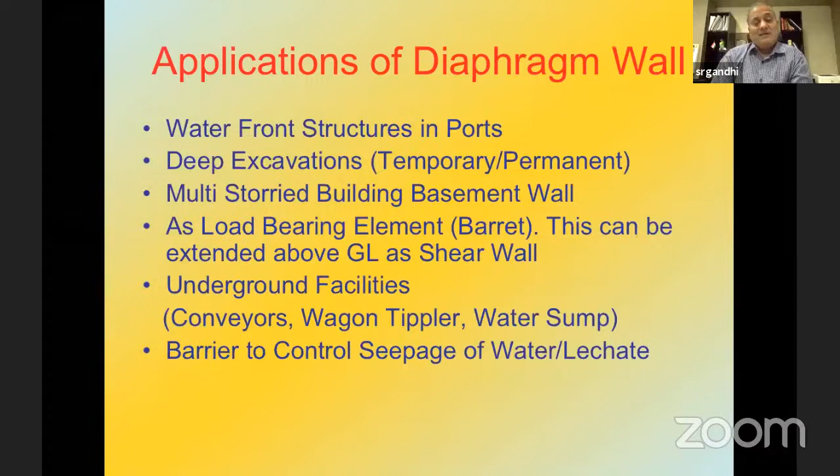It's also used for underground facilities like belt conveyor, wagon tippler, water sump, and also as a barrier for control of seepage of water or leachate in a municipality solid waste dump or other harmful waste dump.

The common shapes of the diaphragm wall section: the most popular is rectangular because the construction is simpler here. The length of a panel varies anywhere from 2.5 to 4 meters, sometimes even wider if the equipment for handling larger size reinforcement cage is available. But normally it is 2.5 to 4 meters.

Width is typically minimum 0.6 meter to up to 1.2 meters. And depth up to 25 meters have been executed without much difficulty. And in some cutoff walls, it has gone to deeper levels also.

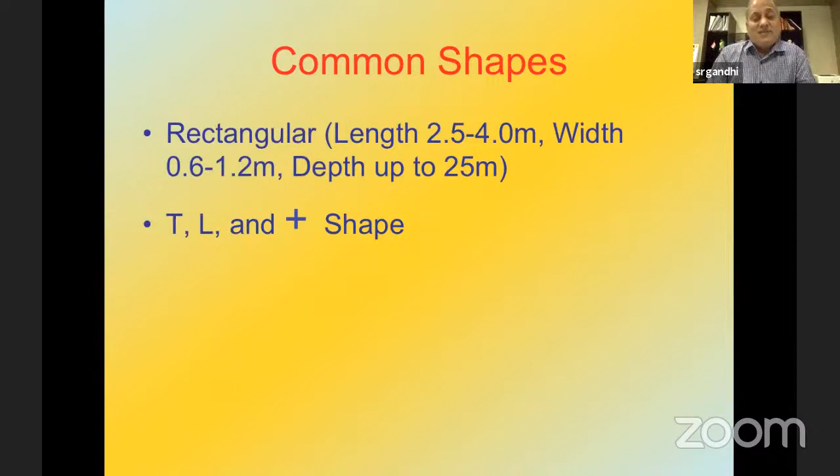Apart from rectangular section, the T section is also very commonly used where you have larger depth of excavation and you want to avoid struts or anchors because it has higher moment of resistance. So you have a T section. L section is used more for the corners of a berthing structure in a port, and the plus section is used as a barrette for a load-bearing element, as I mentioned earlier.

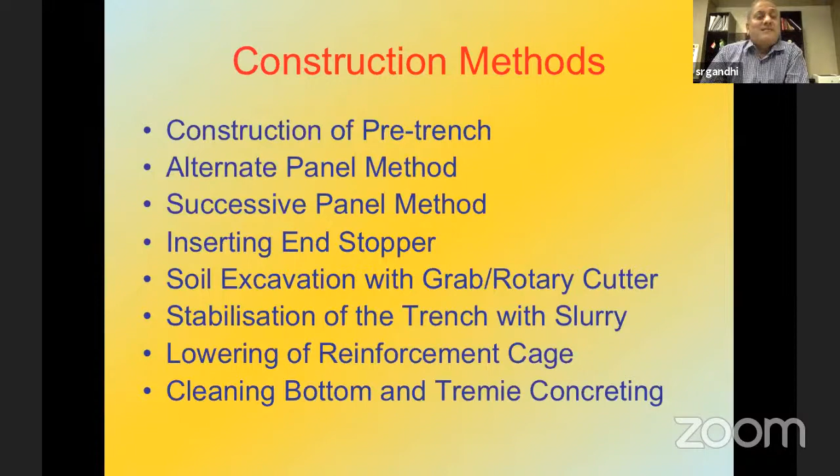The construction of a diaphragm wall panel is more or less similar to what we have for bored cast-in-situ pile. You have the same temporary support at the ground, then excavation or grabbing from this temporary support, and then you have bentonite slurry stabilization and lowering of reinforcement cage, cleaning the bottom, and tremie concreting, as in case of a bored cast-in-situ pile. We will see with the pictures some of these operations.

I already discussed the stability of trench wall is very important in diaphragm wall construction. Other important thing is water tightness of the joint between the two panels of diaphragm wall. So if this is not there, you will have a lot of groundwater seepage into the basement or underground railway station and all, which needs to be tackled.

You need to embed the diaphragm wall in rock sometimes, so you need special tools for cutting the trench in rock. And in many places you prefer a strut-free excavation.

So up to certain depth, it is possible using the T-shaped panel. And there are various claims for extra consumption of concrete if the soil investigation is not right, and if there are collapses observed which are not foreseen based on the soil data.

So when it is used as a basement wall for an underground metro station or a basement of a building, it's also important to have a monolithic joint with the foundation floor. So this is one of the points in diaphragm wall construction.

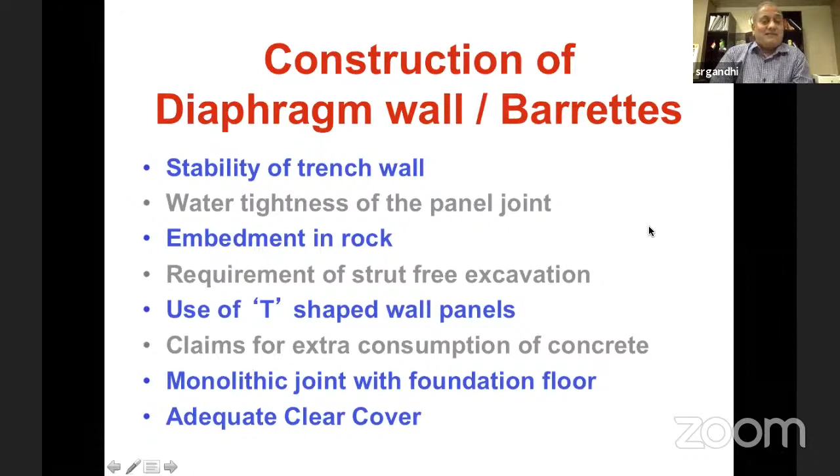So the first step is to construct a small trench, prepare this concrete pre-trench, and then the tool can operate between the pre-trench, between the two L-shaped sections, to cut the soil between the two sections.

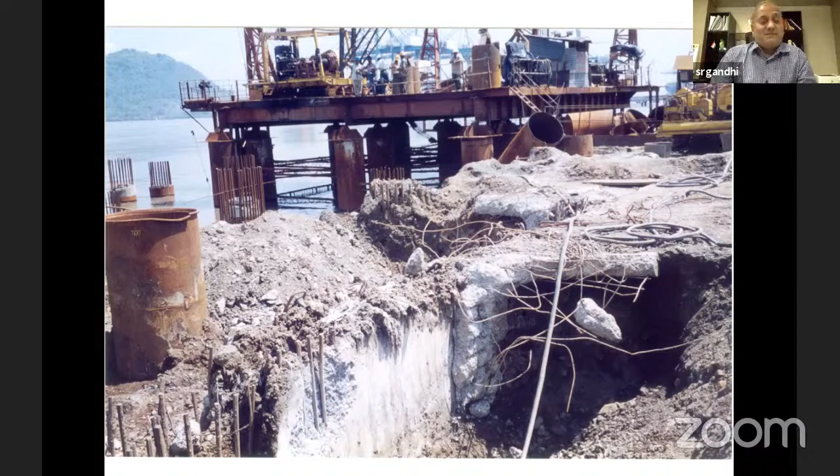So here you see a typical view of a hydraulic grab, which is used to cut the diaphragm wall panel. There are two pre-trenches here between which the soil is grabbed and removed. And there are different types of equipment available for cutting the trench.

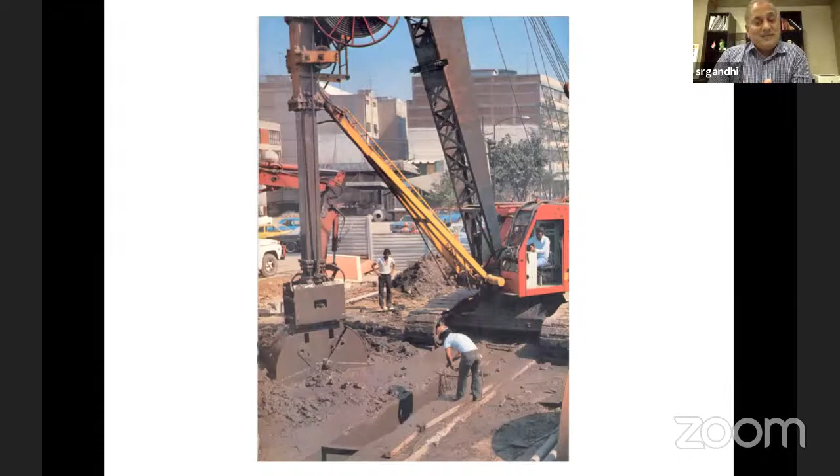The trench, as you cut, it has to be stabilized with bentonite slurry. So you always find the diaphragm wall site muddy or messy like this, with all excavated soil and slurry spilled around. There's another type of...

Normally 500 to 600 mm thick. So that's why you need minimum thickness of 600 mm for operating this tool in the pre-trench.

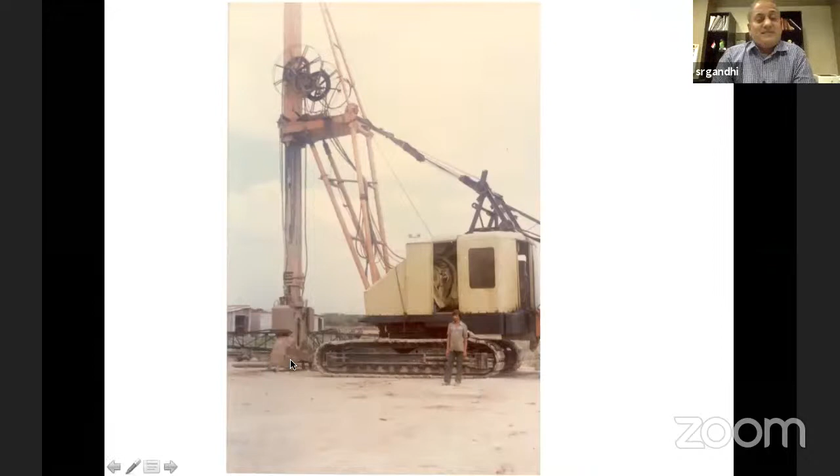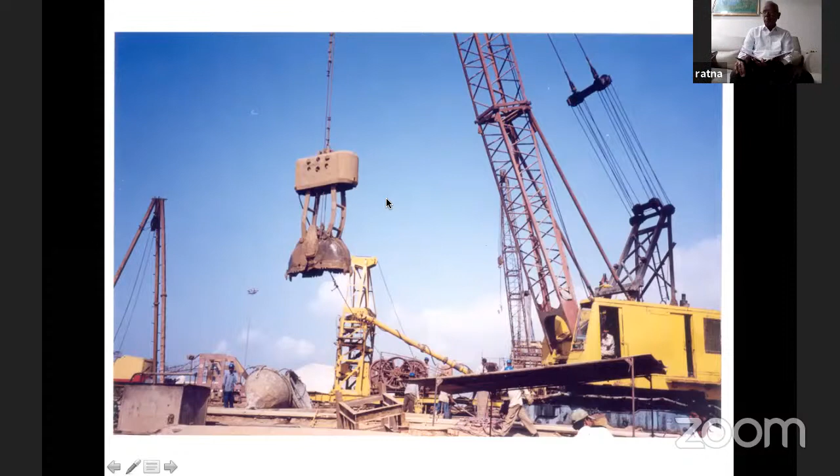Now this is an old system where you can have the grab operated through a wire line. It's not so much desirable because you have less control on the orientation of it. And there are chances that as you go deeper, it may not maintain the orientation in line of the diaphragm wall. It's very rarely used now.

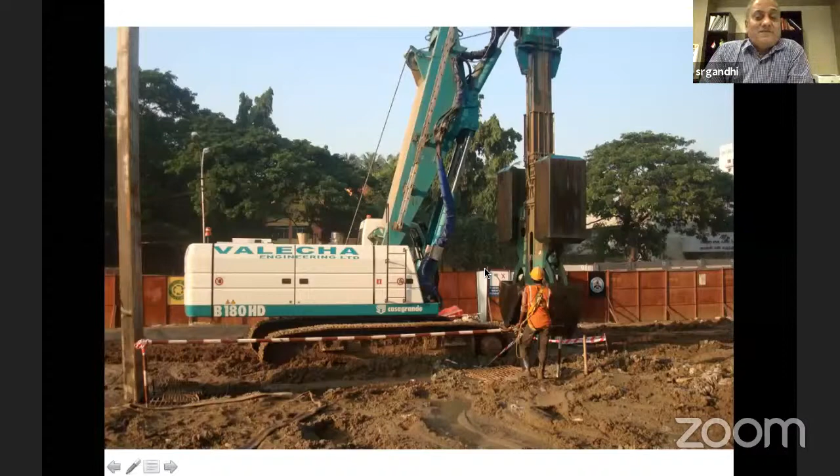So these are the powerful diaphragm walling tools which have a width of 1 meter and can penetrate 15-20 meters deep below the ground. What you see, the attachment here, is having a telescopic section like the aerial in your TV, and as it penetrates in the ground, a smaller section emerges out.

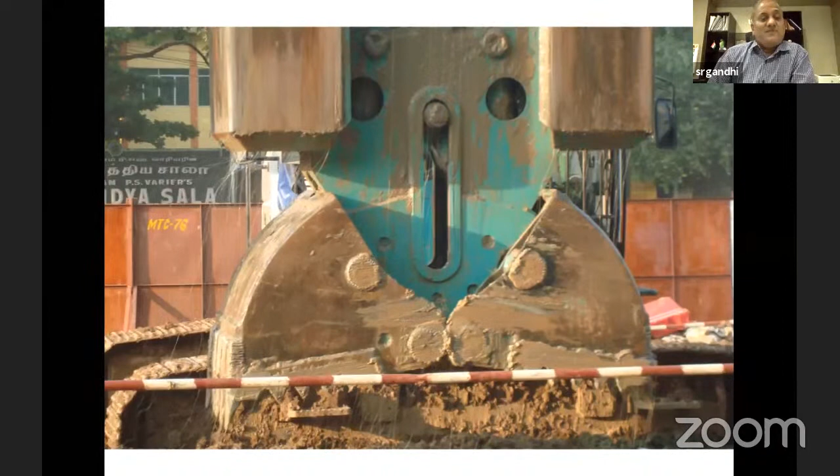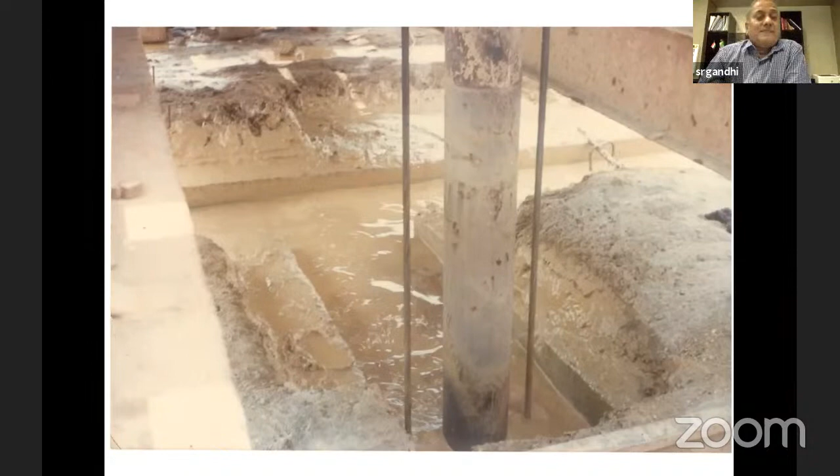So what you see here is the cutting tool, and this is the rod which you saw in the earlier slide. The cutting tool is operating at the rock level or hard strata. It has a lot of sharp-edged tungsten carbide tips, and bentonite slurry is sucked from this mouth here, so it's the reverse mud circulation.

There's a high capacity pump, which you will see in the next picture, which sucks the bentonite from the trench at high velocity, and all the cut material is sucked by the bentonite, which moves up in this pipe, goes through the pump, and is thrown out at the disposal site. What you see in the background is the Vijayawada thermal power station at Ibrahimpatnam, where this diaphragm wall trench is made for a cooling water sump.

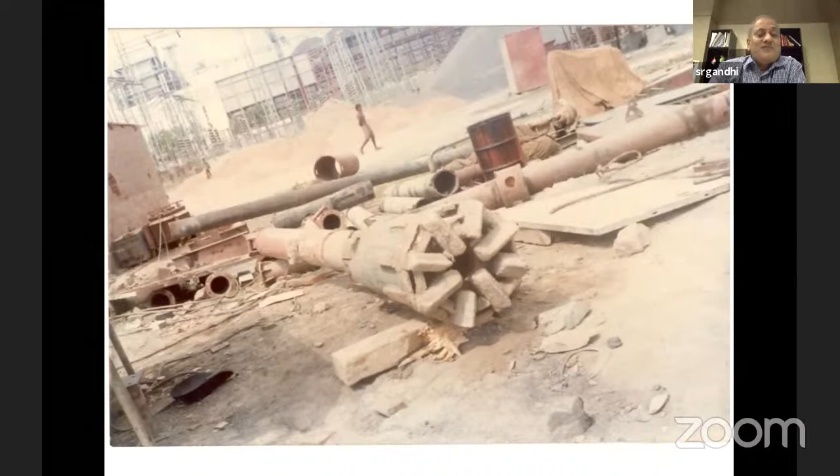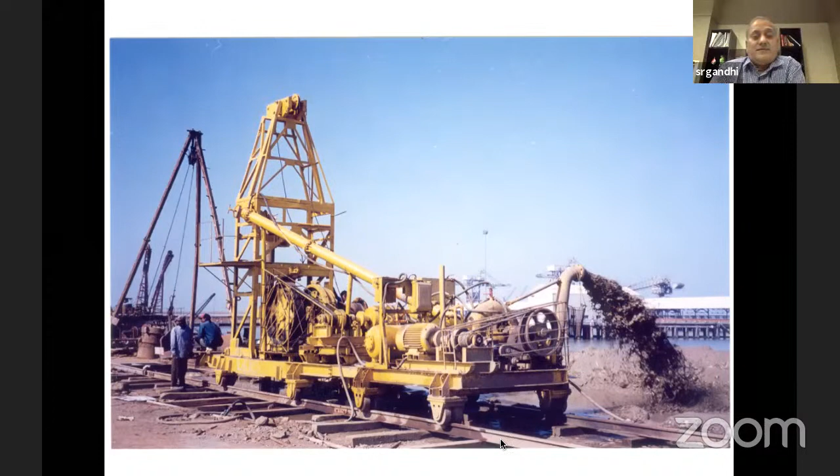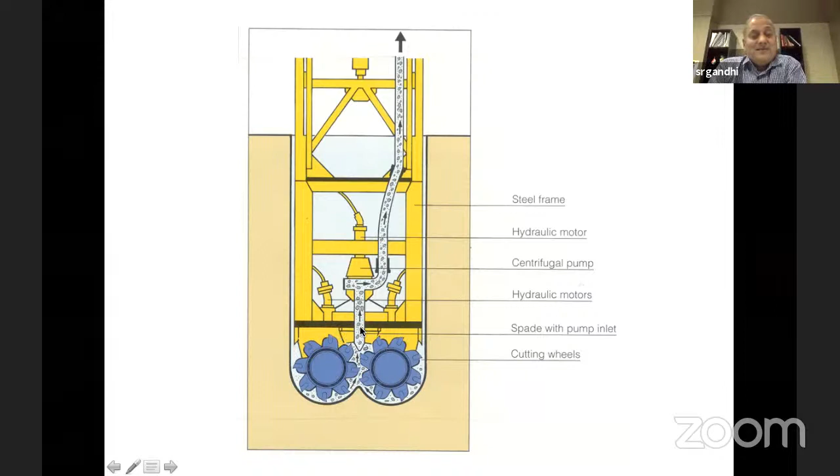There are other types of devices used for trench cutting. This is a rotary device with two rotary cutters, blue in color, rotating in opposite directions - one clockwise, one anti-clockwise. The cut material is led into the central portion, and a high capacity mud pump sucks the cut material and takes it out to the surface to the required disposal point. The width of this frame equals the width of the panel of diaphragm wall required.

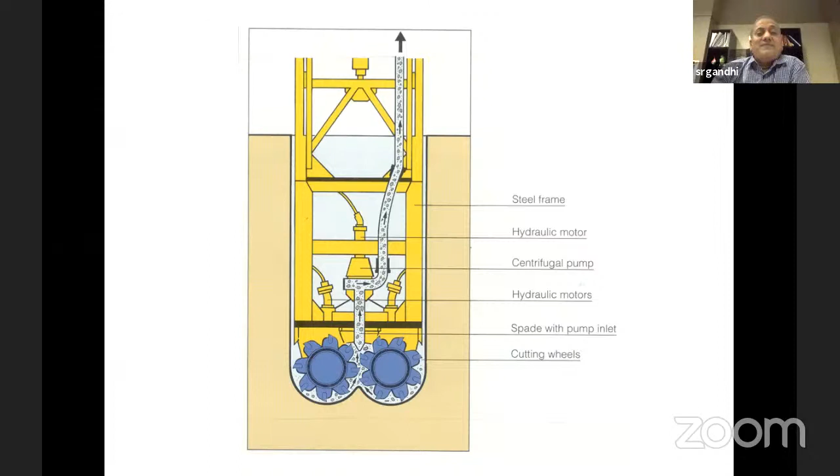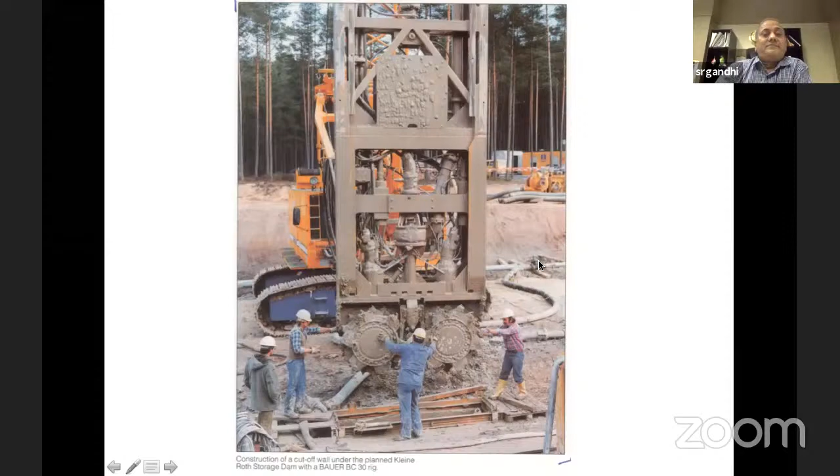The thickness of the cutter is same as the thickness of the diaphragm wall. This is faster in operation because you don't have to move the tool up and down; it keeps going down and advances the trench without needing to pull it out. Here you see a pictorial view of the rotary cutter with two cutters having sharp teeth, and the mud pump which picks the cut material. This is lowered inside the trench up to large depths of 15, 20, 25 meters, and the discharge pipe attached to the pump brings the material to the surface for disposal. Another view shows the hard tungsten carbide teeth - if worn out, these can be replaced with new sharp ones for effective cutting.

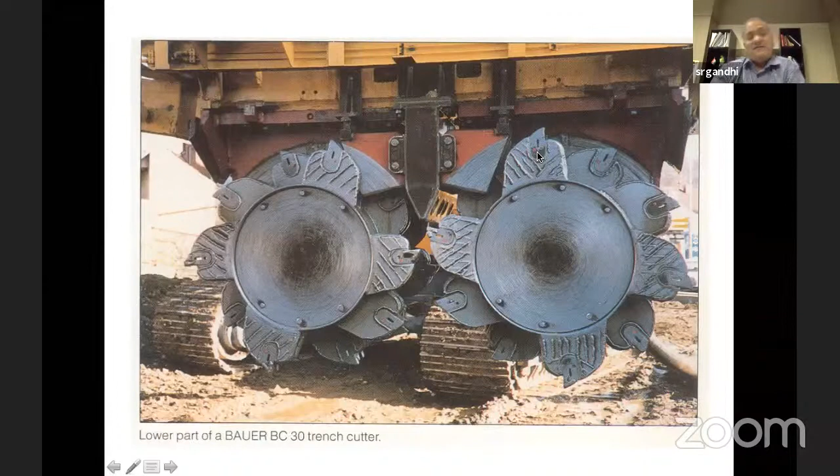The other difficulty mentioned was maintaining the cover. The diaphragm wall reinforcement cage is so heavy that though cover blocks are provided like in bored cast-in-situ piles, if the ground is soft, the cover blocks penetrate into the soil, and as a result you won't have the required cover, which exposes the reinforcement. In marine environment this gets easily corroded, resulting in reduced moment of inertia or collapse. This should be avoided by carefully lowering the cage.

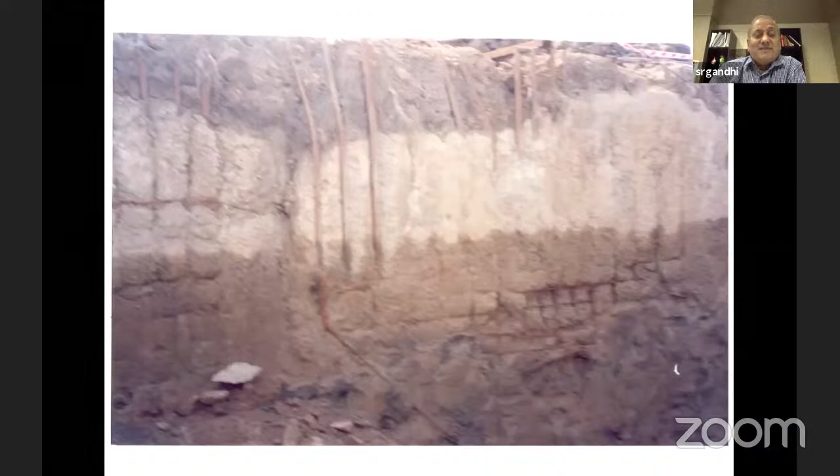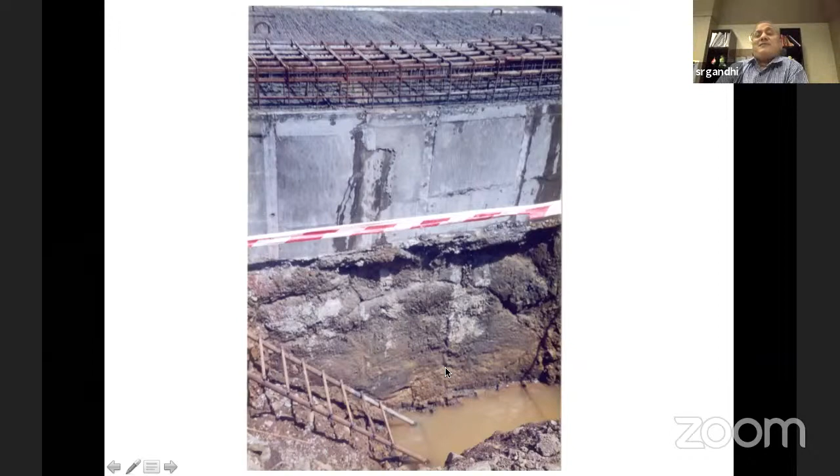Water tightness between the joints is also important, especially for underground basements and metro stations. Here you see excavation made to check the joint between two panels. If the panels are cast with proper care, you get a very tight joint, and later we will see how to make this waterproof. Like we provide a rubber stopper in construction joints, you can also provide a rubber stopper between two diaphragm wall panels, and it's always provided wherever water tightness is essential.

Here you see a trench which is a panel already cast with concrete, and here you can see the rubber stopper - there are two of them. What I haven't discussed is the end stopper, seen on either side of the diaphragm wall panel. There are two options for casting a diaphragm wall: either use the alternate method of construction, where you cast one panel with end stoppers on either side, and after completing this panel, you don't take up the next panel but go to the alternate panel, again using two end stoppers.

After the primary panel with end stoppers on both sides is over, you can take up the secondary panel for execution, where you don't need any end stopper because on either side you have a completed panel. The purpose of the end stopper is to ensure the tool lowered inside operates only between the specified distance between the stoppers, and doesn't make the panel wide.

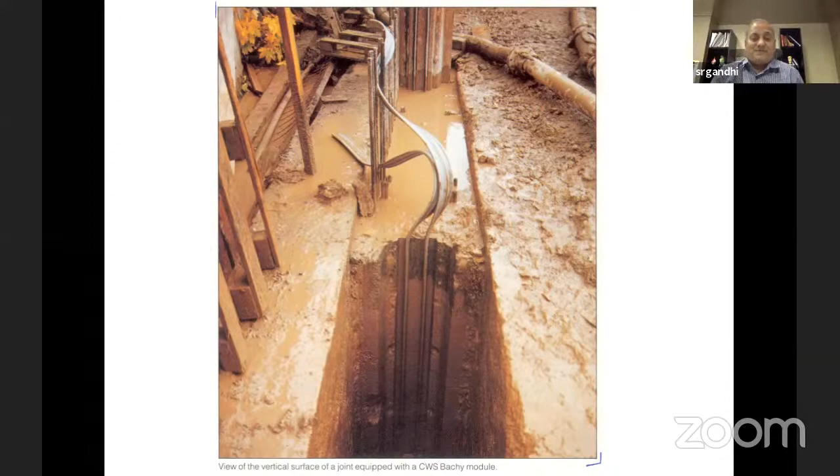It's a flat diaphragm wall. This is a picture of one of the metro constructions in Chennai, where the width of the diaphragm wall is 1 meter. You see the end stopper section, which is 1 meter wide, giving a profile like a trapezium. A groove is provided in the end stopper to place the PVC rubber stopper, and it's lowered after the required cutting is over.

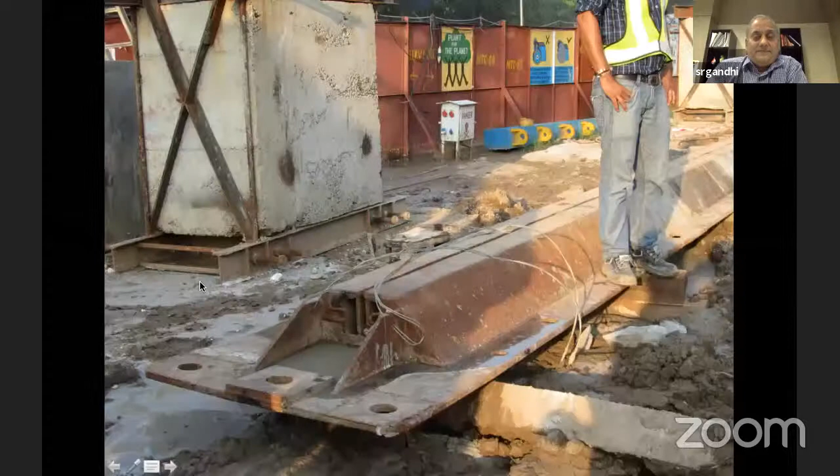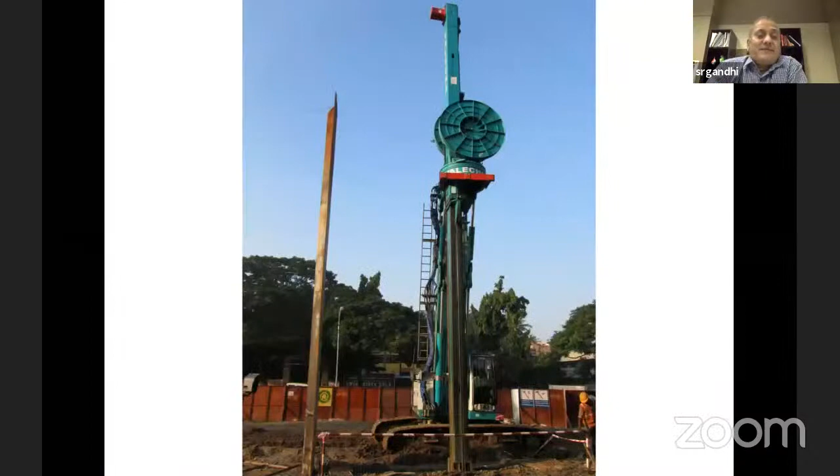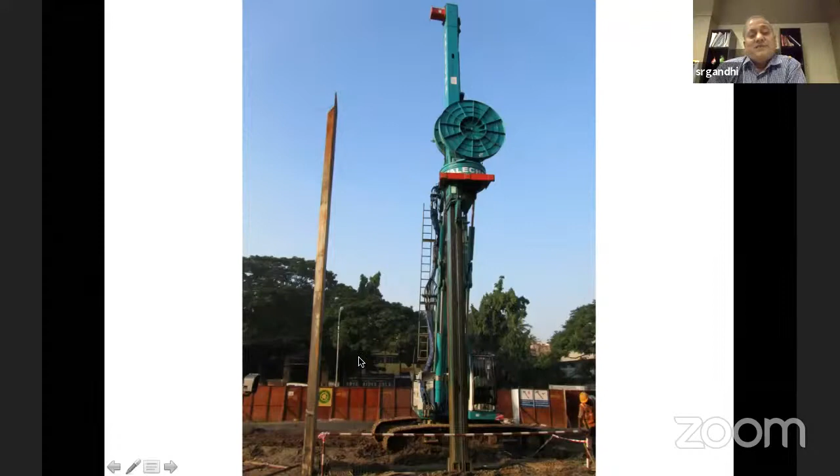Another closer view shows the groove through which the rubber stopper is inserted. This end stopper has lifting hooks to lift it and lower it into the panel. Here the end stopper is being lifted to lower it in the excavated trench before concreting. It's like formwork on two sides.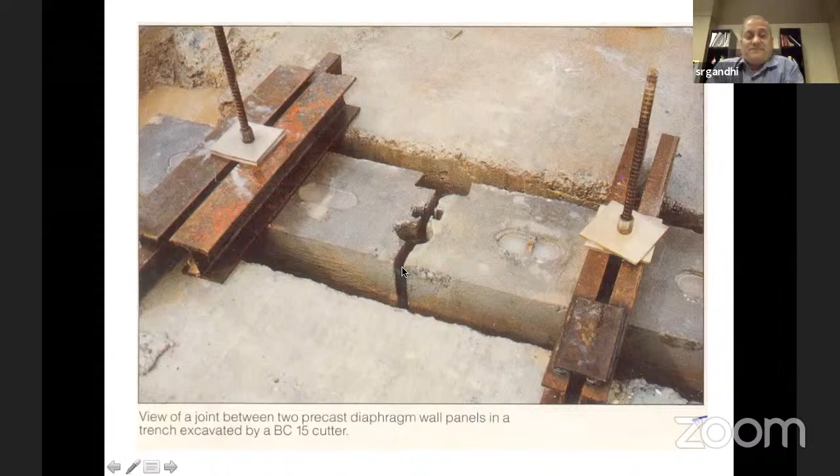In pile reinforcement, you can have the reinforcement in 2 or 3 lengths, which you connect one after the other as you lower. But in diaphragm wall, because of the large number of main reinforcement bars involved, making so many lap joints is difficult, so it's always made in one go and then lowered with a large boom crane.

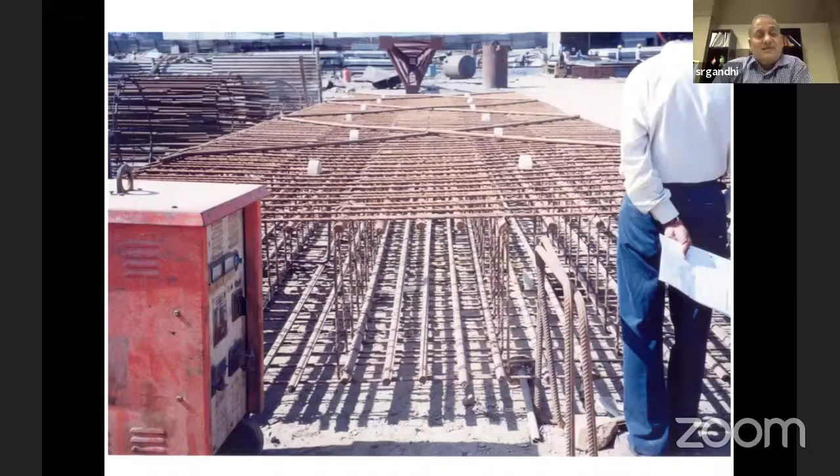You can see here the cover blocks, gray in color, and there are diagonal steel members provided on all 4 sides. This is to make sure that when the cage is lifted, weighing maybe 20, 30, 40 tons, it does not get skewed under the weight. So the diagonal steel acts as a bracing to keep the cage stiff when it is lowered inside.

Similarly, this is an L-shaped diaphragm wall panel. This is for a fertilizer berth at Paradip Port.

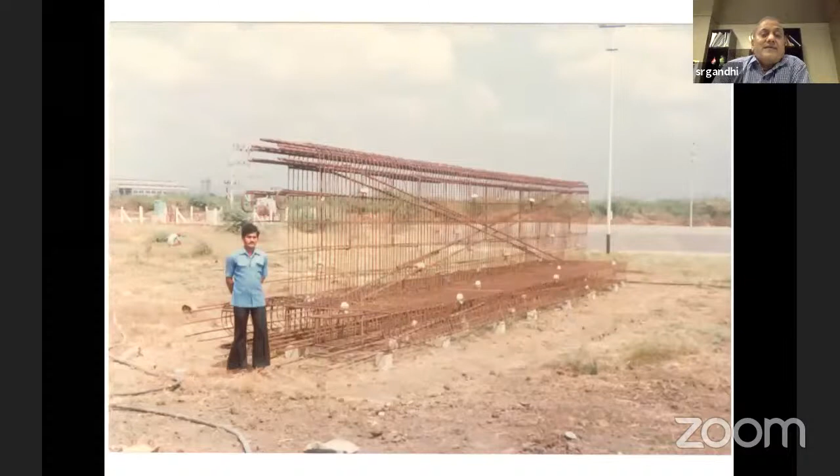And this is reinforcement cage for a T-shaped diaphragm wall. Same again, diagonals and cover blocks you can see here.

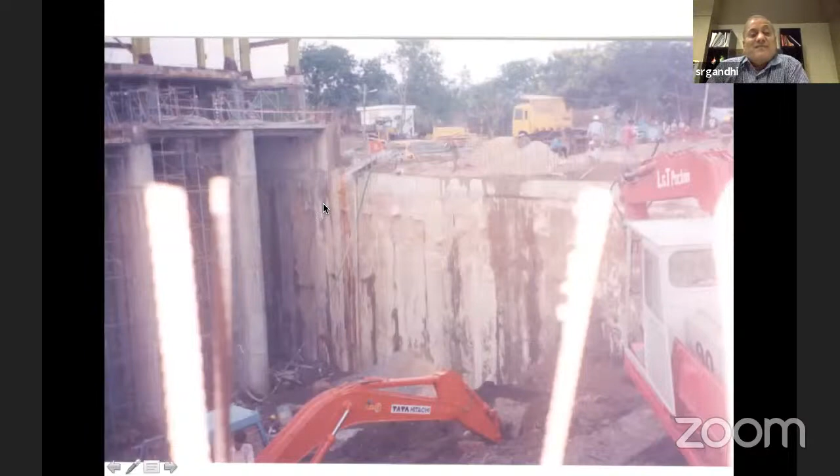So this is again at Vijayawada. This is the cooling water intake from Krishna River at Krishna Barrage. And from here, the water is pumped into the canal which goes to the Ibrahimpatnam thermal power plant. So this depth is some 15 to 20 meters to get the required water depth for the pump to operate.

And they didn't want any struts or anchors, so a T-shaped diaphragm wall panel is used. What you see here is the flat section of the T-shape, and the web of the T section is behind, embedded in the soil.

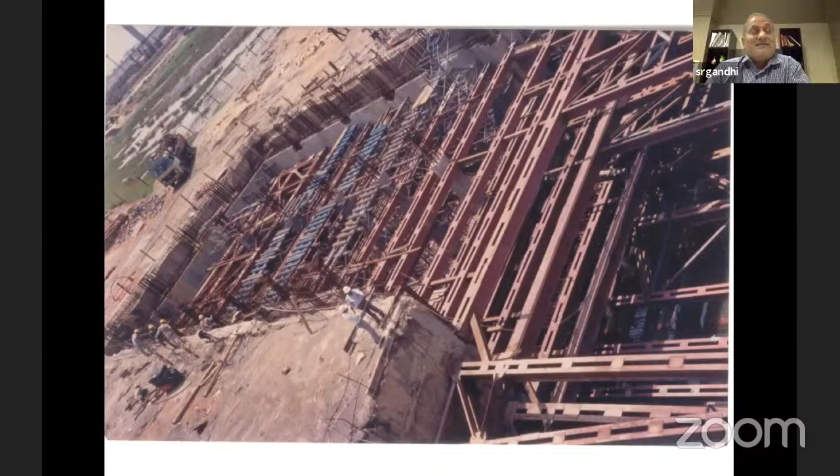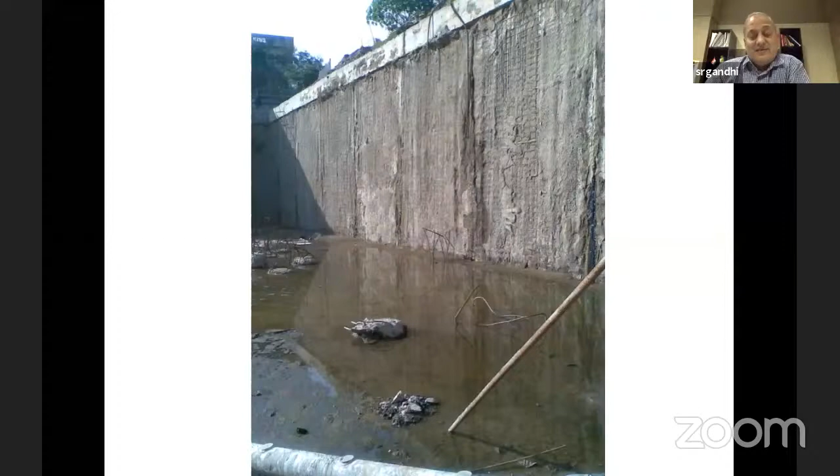And this is the diaphragm wall panel, you can see the width is about 5 meters. You can see the construction joint between the diaphragm wall connected with a coping beam. It's not cantilevered, but provided with one row of anchors at the top through the coping beam. The anchor goes 45 degrees towards the land, holding the diaphragm wall. So the construction becomes much simpler in the absence of struts.

I'll now come to some of the experience with the Chennai Metro, where diaphragm walling had to be done through a very congested area of Chennai Central Station and Egmore. This was carried out by AFCONs, and we were advising them on various instrumentation monitoring of the construction.

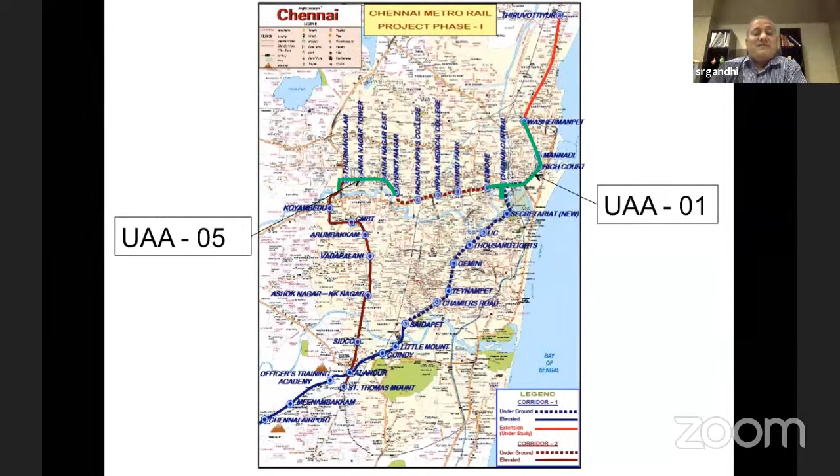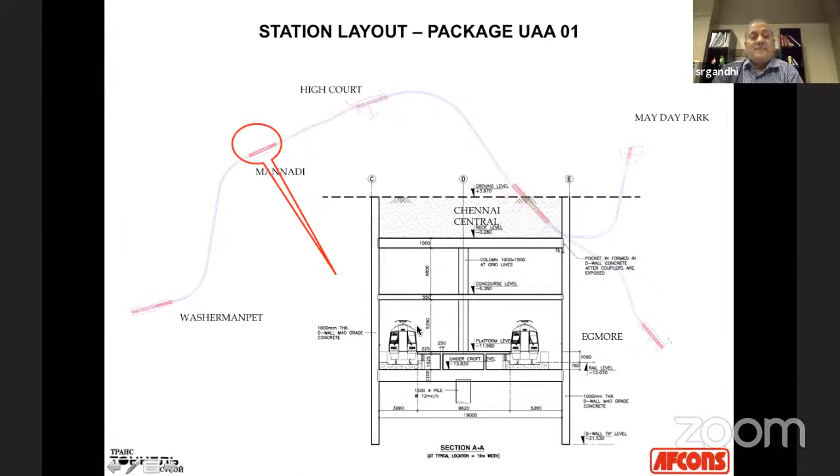So only one underground station at Chennai Central has 2 lines meeting at the same point, which is at 2 different elevations. And this is the largest metro station in Asia in terms of its length, its depth, and all other features.

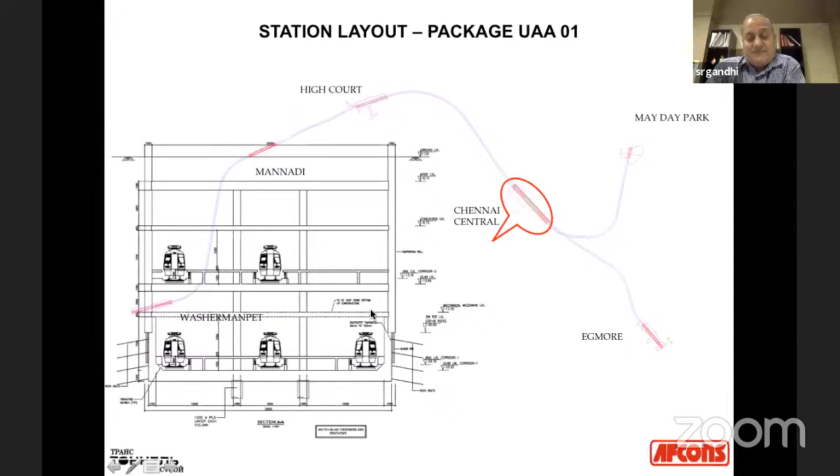You may not be able to read much details in this slide, but this is the Chennai Central Railway Station, and the Victoria building - I'll show you a picture of this. And then we have a Ripon building adjacent to it. The entire station is covered from the beginning of the central station to the end of Victoria building.

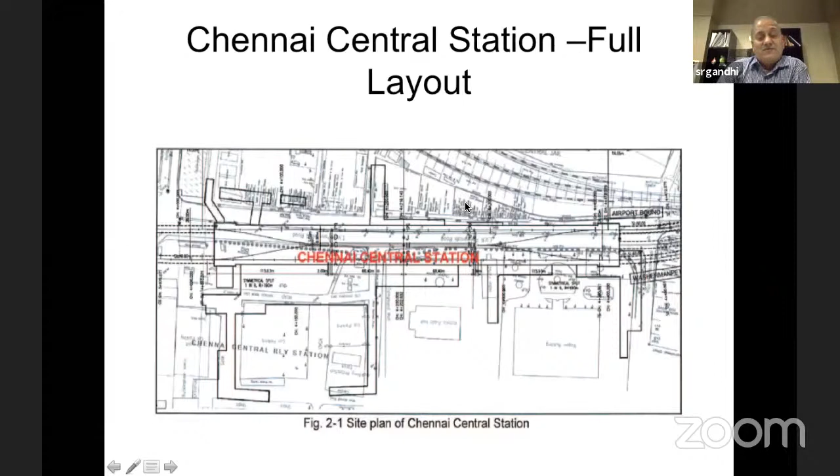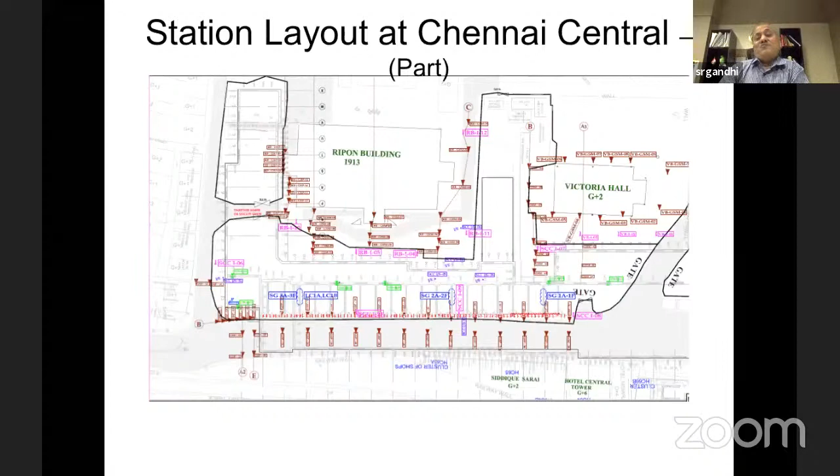The diaphragm wall required for this is passing very close to the foundation of some of these heritage monuments like Victoria Building, Siddique Sarai on the opposite side, and so on. So we had to provide extensive instrumentation comprising of settlement gauge, piezometer, inclinometer, load on the struts, etc. I will discuss it later.

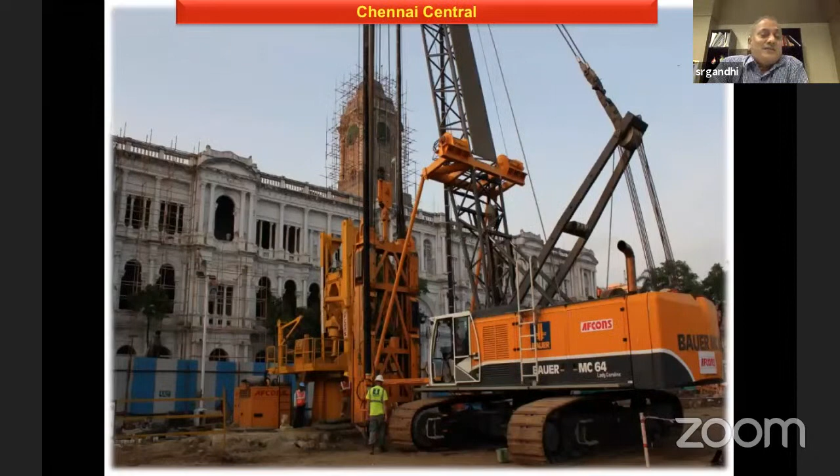So this picture of Ripon building next to the Chennai Central, many of you would have seen the building. It's a heritage structure, very beautifully designed, and it has large floor height. Though it is 3 floors, the height is more than 15-16 meters. The diaphragm wall is passing just a few meters away from it. There was a concern whether excavating the diaphragm trench will create any issue with the stability, because this is not on pile foundation, it is on shallow foundation built more than 100 years back.

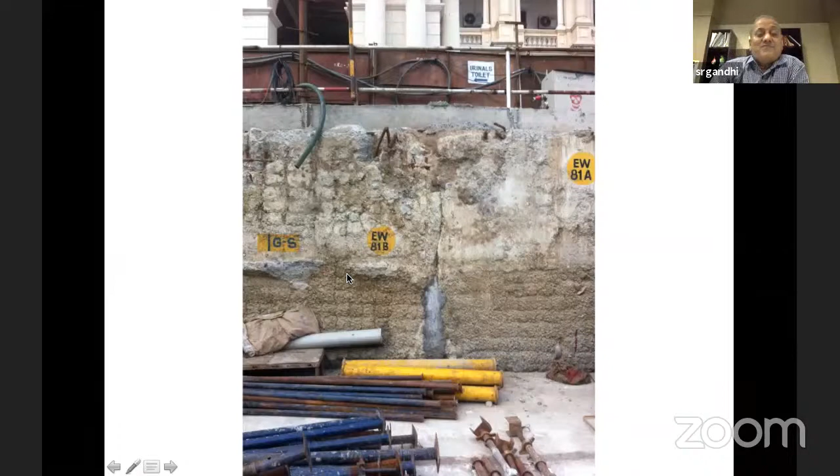So you can see here the diaphragm wall constructed and excavation started. There's a joint between the two diaphragm wall panels, and we discussed the problem of cover - you can see slightly reinforcement getting exposed here. So all this will need a special treatment to treat the steel and put micro concrete to protect it from future corrosion.

The other problem in diaphragm wall trenching is collapse which takes place during that trenching. So you see extra concrete here, which is projecting from the face of the diaphragm wall. This should not have been there if collapse had not taken place. But because of the collapse, you have extra concrete consumed here, and now you have to cut it and remove it.

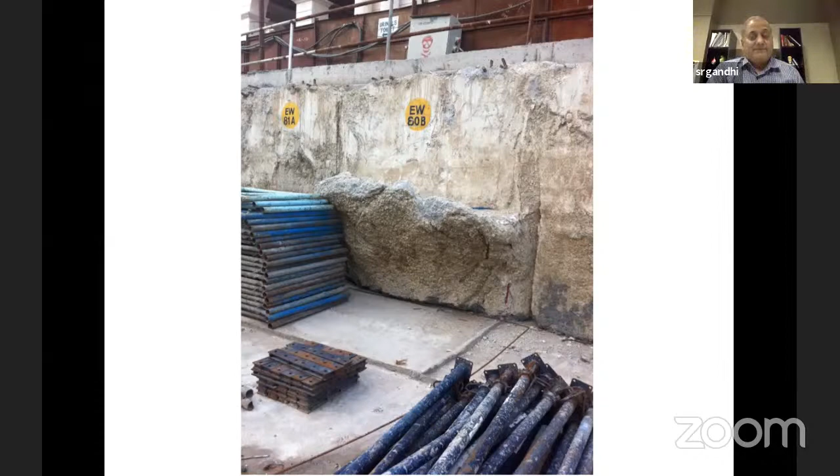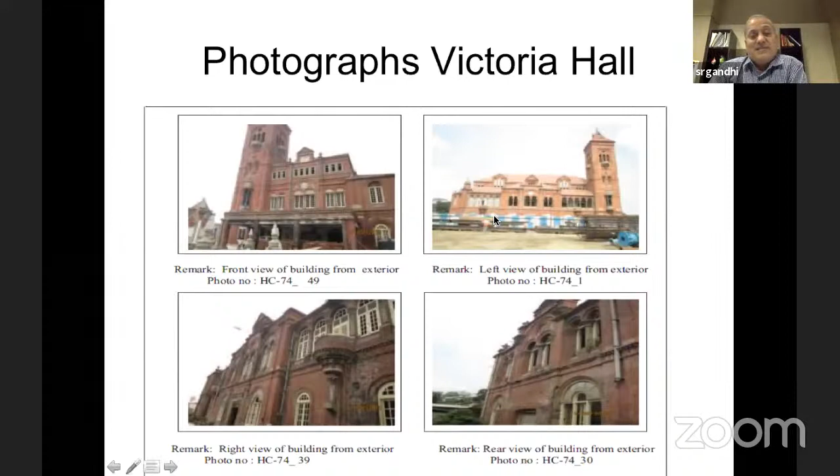Opposite to Victoria Hall, there's a mosque and a tourist home called Siddique Sarai. This is also a heritage building, 100 plus years old, with a lot of shops on the ground floor. And the diaphragm wall for the metro construction under this is right on the footpath of this, leaving only 2 to 3 meter clearance from the face of these shops. So all these shops had very limited access for people throughout the construction period of the metro station.

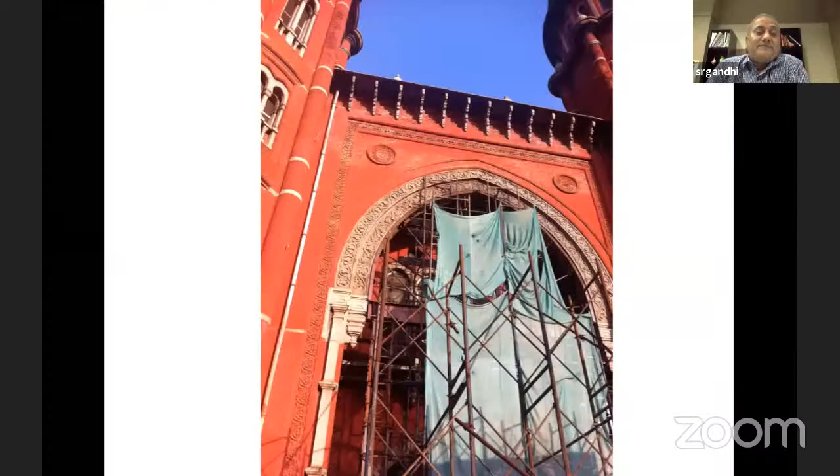Another important heritage structure is the Law College building, which is not at Central Station but at Parry's Corner. It is next to the existing High Court there. And this Law College building has a beautiful arch for its entrance. During diaphragm wall trenching, which was only a few meters away from this foundation, certain cracks were seen in this arch, which raised an alarm, and extra precautions were taken by additional grouting in the foundation before the work had progressed.

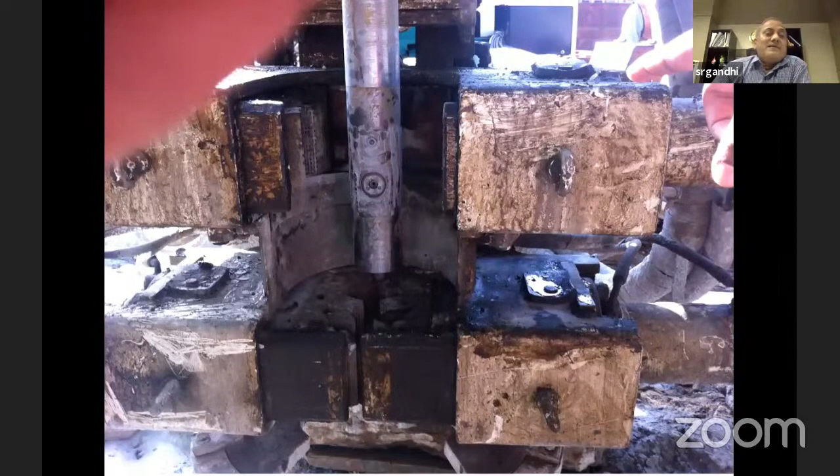So this is the grouting machine used for grouting, coiled around the diaphragm wall.

As I told you, the trench operation is more serious for collapse compared to bored cast-in-situ pile, because the section is rectangular, which has a flat surface, and the collapse can easily take place. When you have a shallow foundation very close to the trench, there are chances of additional settlement taking place if collapse takes place in the wall, or if there is piping taking place under the diaphragm wall toe when you do the dewatering. So it was necessary to have extensive monitoring of the building.

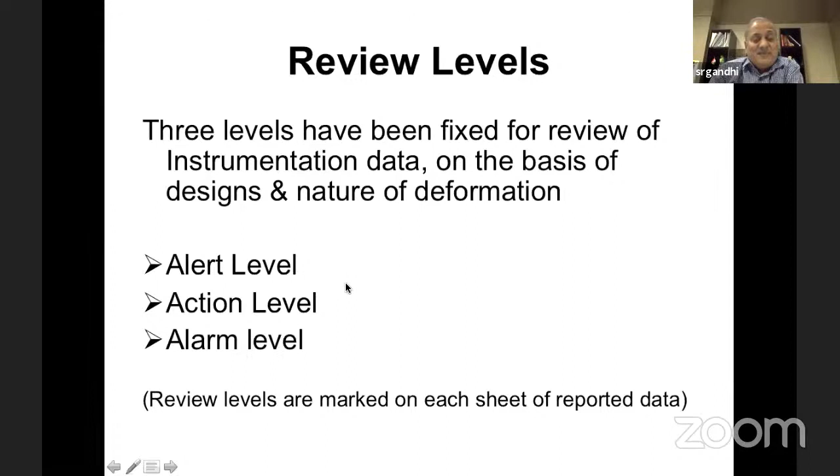So while fixing the instrument, the criteria were decided for when you call the value measured as being in alert level, action level, or alarm level. So these parameters are fixed as you see here.

The green line indicates alert level. This is for the vertical settlements. If the building settlement is more than 10 millimeter, it's an alert level. If it is more than 16 millimeter, it is an action level. And if it exceeds 20 millimeter, it is alarm level.

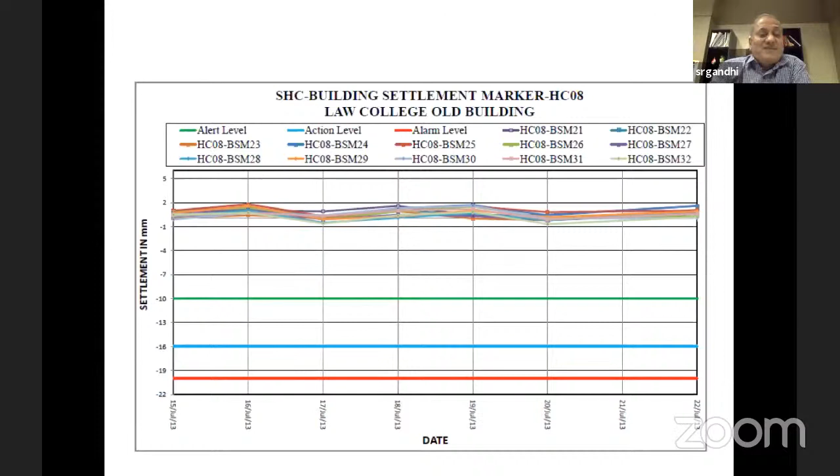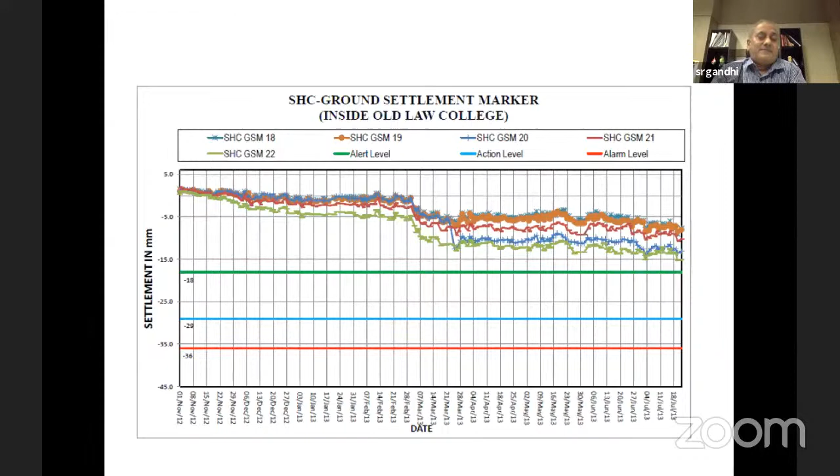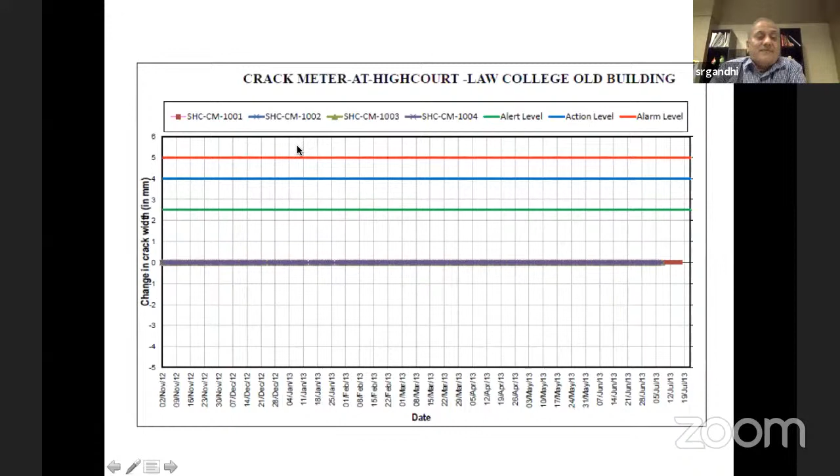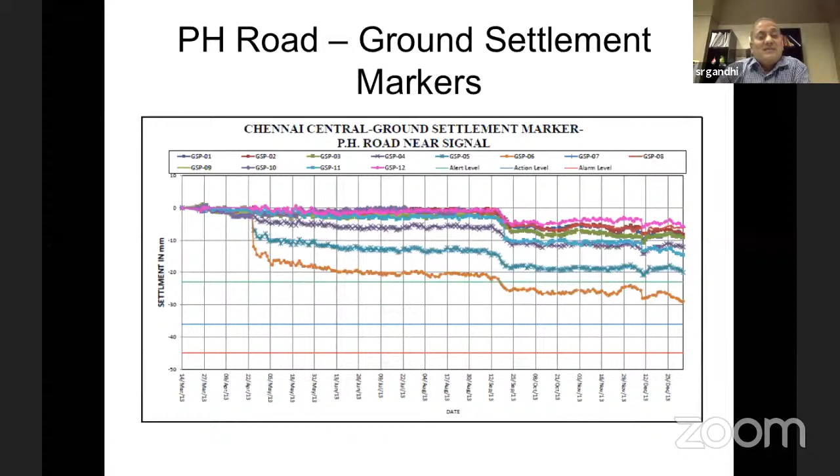So I will skip these slides. These are the measurements of different parameters. Some places it became very close to the alarm level, and extensive grouting had to be adopted to prevent further movement. I'll now show you some of the pictures when the metro construction was carried out.

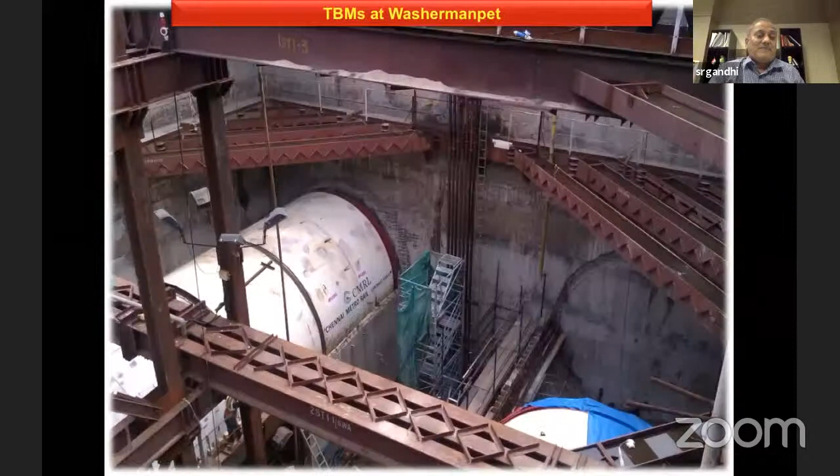This requires a lot of struts, and you have to carry out the work between the struts, as I was mentioning earlier. So this is the location where the trenching equipment, the tunneling equipment, is lowered down from the ground level. It cuts the diaphragm wall at a predetermined location, and then tunneling advances to the next station.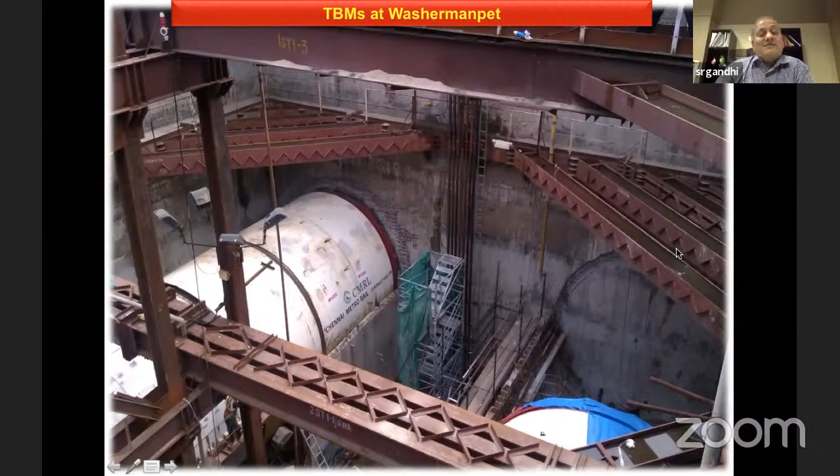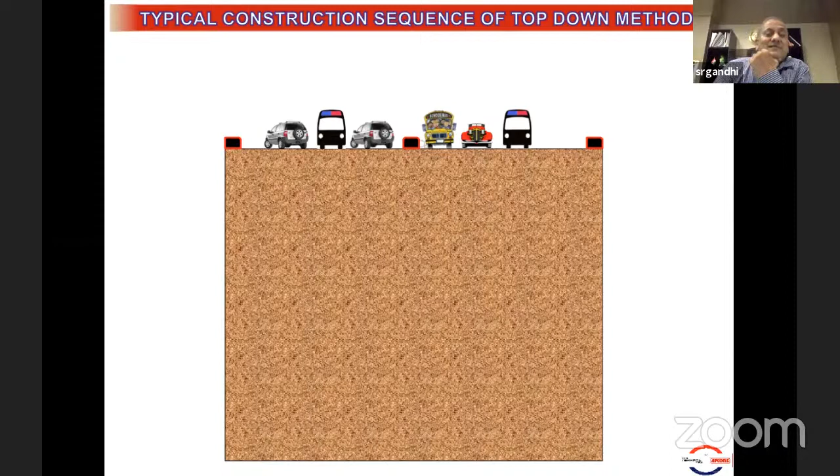So I discussed two types of method. We'll see the top-down method where we don't need struts to be provided, but the diaphragm wall is supported by the floor of the station itself. So it is something similar to this.

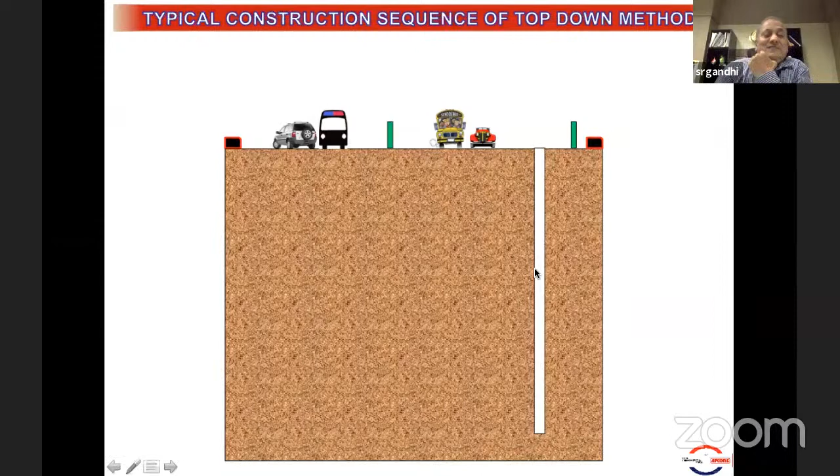What we do is divert the traffic and insert the diaphragm wall panel first on either side, so the traffic should be diverted elsewhere, complete. So what you see here, one side is the diaphragm wall, other side is not diaphragm wall, it is only a pile borehole made with a steel section embedded in it. So what you see, this gray color is a steel section. It is concreted in the portion below the bottommost raft of the station.

So this is not a continuous diaphragm wall. This total width you see here is only half the width of the station. Another half width of the station is to be built on this side, and this is the entire 6-lane road on the top. So you have to have certain area available for traffic to move. So you are diverting traffic only from one side, constructing one side partly, as you see.

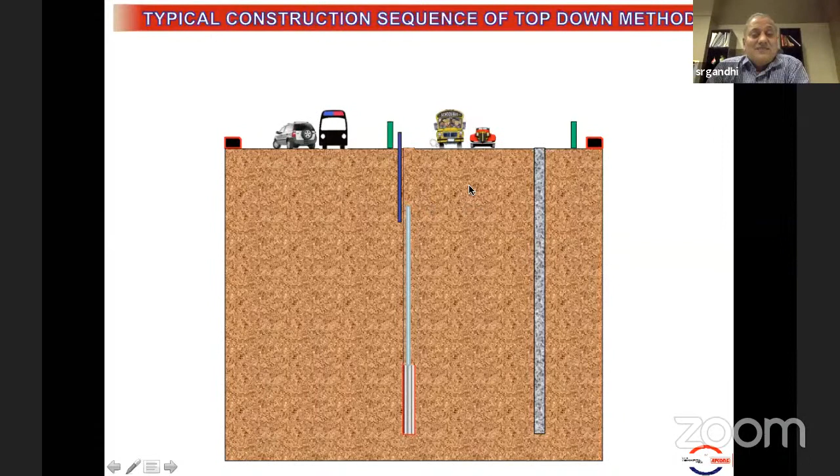So after this diaphragm wall and the column is inserted, you put a temporary sheet pile, what you see in blue color here, and then after diverting the traffic, remove the soil here, as you see here. And then you cast the slab, horizontal slab, which will support the overburden on one side on the diaphragm wall and other side on the steel column, which was inserted through the piling hole. So these typical columns are every 6 or 8 meters center to center. It is sufficient to support this slab and the weight of the overburden over it.

Once this slab is cast, you can have another sheet pile installed and backfill the soil. And now you can take up the work on the other side. The traffic can be moved back to this side because you have backfilled it, and then insert the diaphragm wall on this side.

And excavate this portion. Again, support the RCC slab, one side supporting on diaphragm wall, other side on the steel column. This slab will have an opening because whatever excavation you make below this has to be taken out through this opening. So this slab acts as a strut which is supporting the diaphragm wall. You don't need any structural strut, and then you start excavating below this slab to the next level. If you want more space for construction equipment, you can fill this soil partly with a sheet pile around.

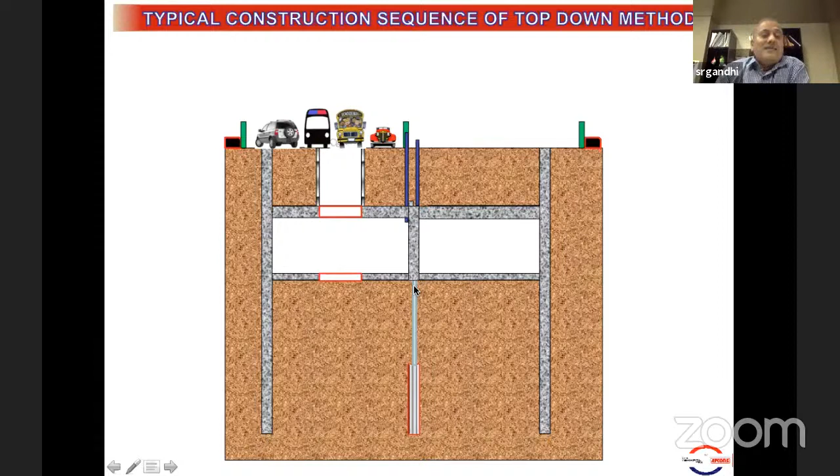Again, one side is supported on the diaphragm wall, another side supported on the steel column. It has an opening to go to the third level, so you carry out excavation.

Provide the bottom slab. After this slab is cast, the steel column was sufficient only to take the self-weight of the slab and certain live load, but not the full load. So you have to encase this steel column with additional concrete and steel, so it becomes the permanent column of this station. Now this section is complete.

You can provide the rail track and platforms as required. Once that has been completed, you can block this temporary opening, fill the soil, and restore the traffic by completing the new road surface.

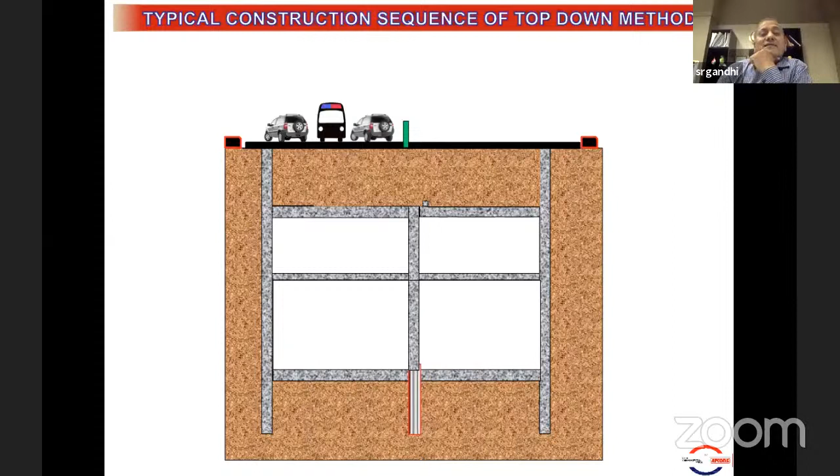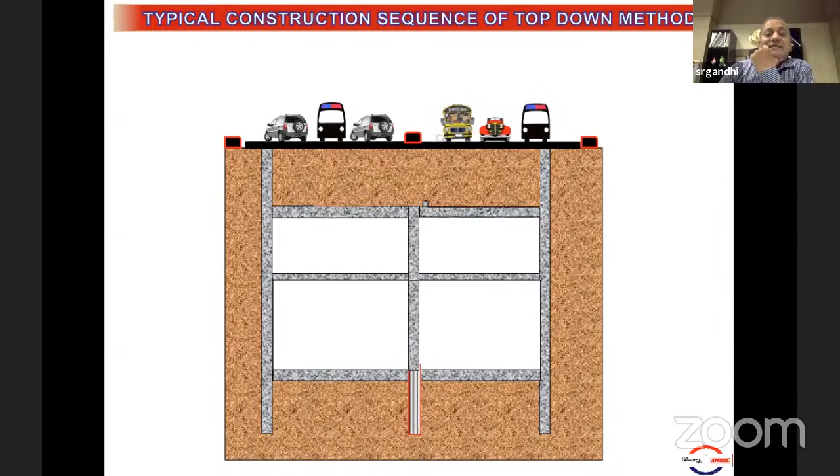So you have a station completed over the entire width of the road with partial disturbance to traffic, and then the traffic is restored. Whereas in the bottom-up method,

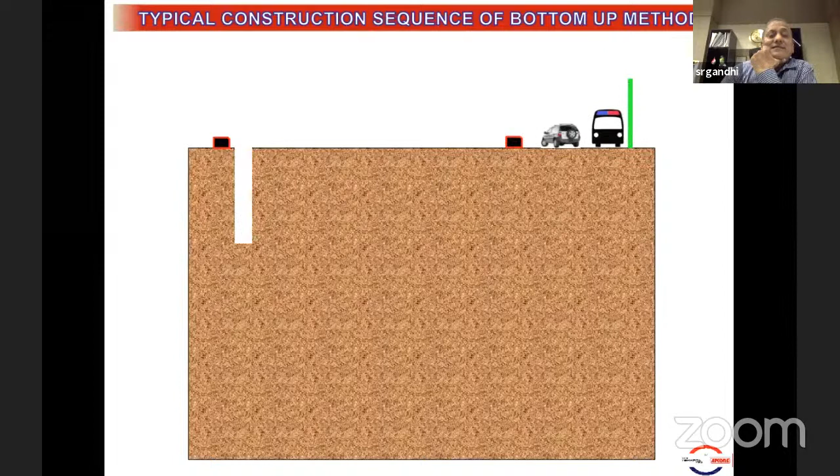you need to have the struts, shift the traffic to one side, and insert the diaphragm wall on both sides. You can again have the steel column in the center, because otherwise the strut will have a very large span and it will have a buckling problem.

Then you start excavating from the top and provide a temporary floor here, a steel floor, so that traffic can be moved over it. Then you take up the other excavation.

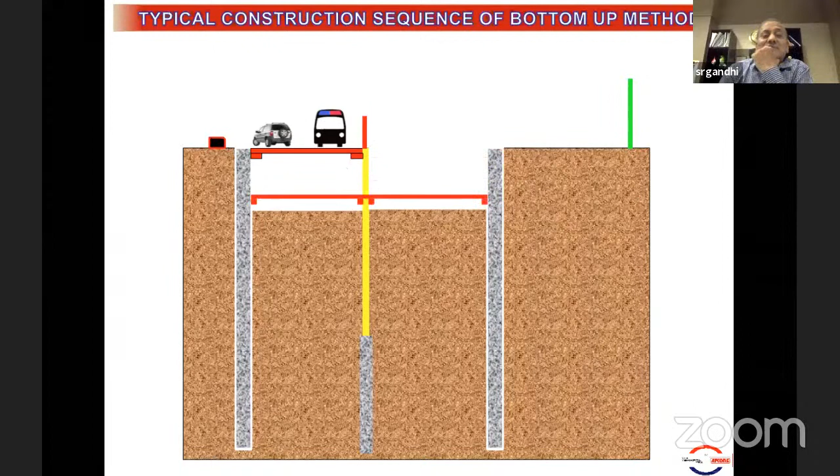Have a steel strut, because without strut you cannot excavate deeper. The diaphragm wall will not take the large bending moment. So all these red color supports are struts between the diaphragm wall and the column.

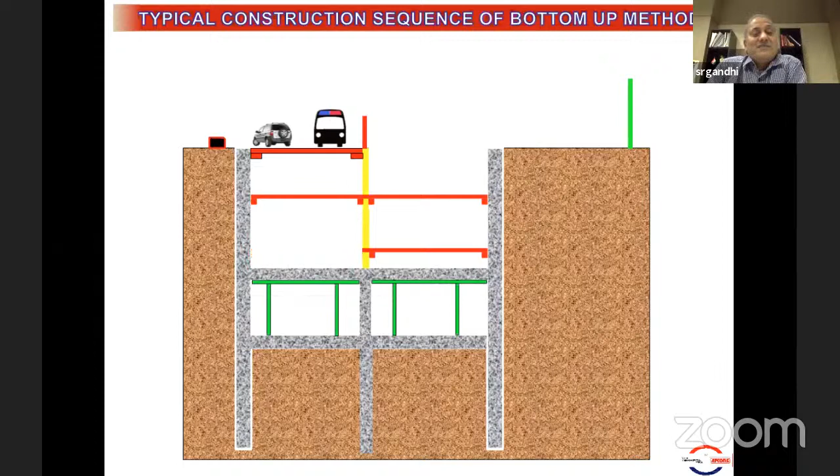Once you reach the final level, you cast the base slab of concrete and then raise the permanent RCC column in the middle, then cast against the formwork staging the intermediate floors, moving the construction up. This is called the bottom-up method. So complete the entire station like this.

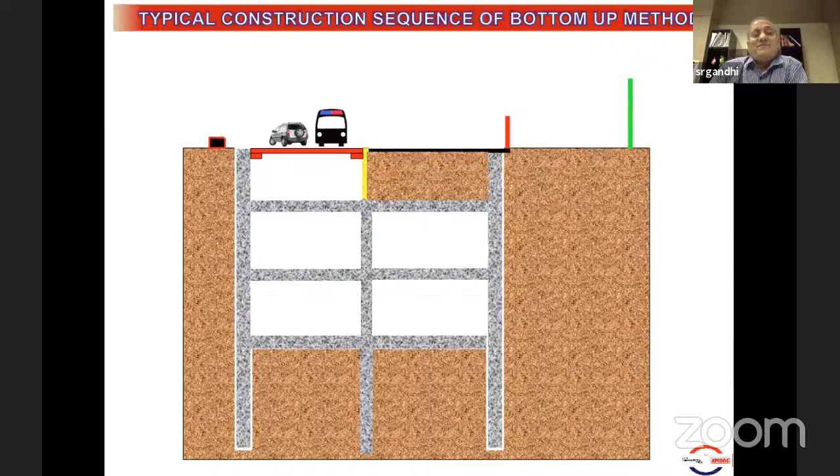Then have the overburden soil over the floor slab, and complete it so that traffic is diverted. So this completes the underground station over the 6-lane road.